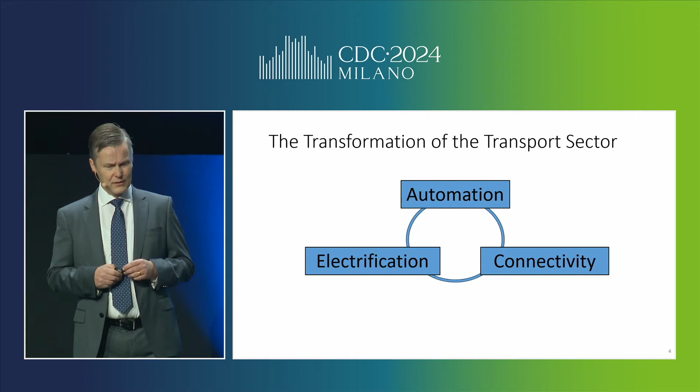If you're interested in doing research in this area in Sweden, it's actually pretty great because we have two of the world's largest truck and heavy vehicle manufacturers in Sweden, Volvo and Scania. And we have throughout the years been collaborating with both of them, and you see some movies here illustrating some of that work.

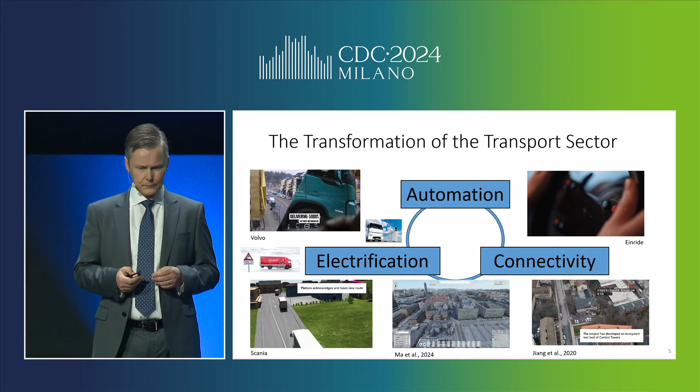But let's look back a bit and let's be a little bit critical. So 10 years ago, SAE, the Society of Automotive Engineers, came up with basically this roadmap of how we should go from the cars and vehicles of today, basically human-driven vehicles, to something where we don't have any driver at all, full automation, level 5.

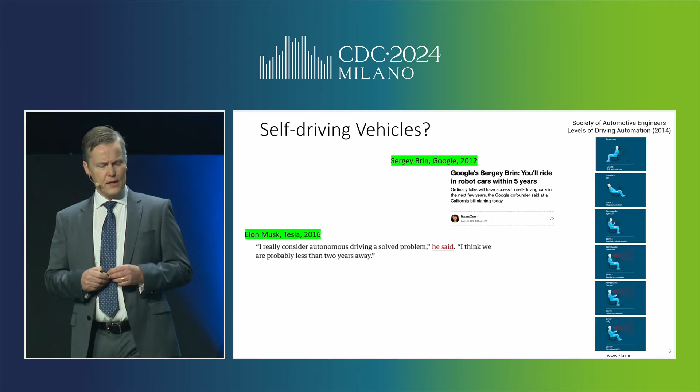And at the time, there were CEOs of big international companies that said, okay, yeah, let's just do it. It's a piece of cake. We just solve this problem. It will take a year or 2 or 3 or so, but let's just solve it. And of course, there is great success that has happened. We have large experiments in the United States, for instance, by Waymo. There are a lot of other success stories.

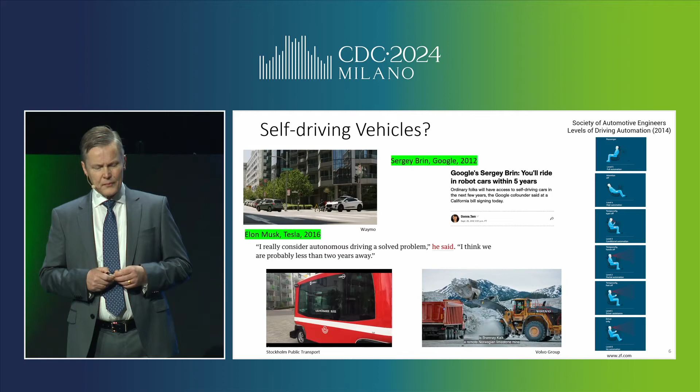You have the videos here from the public transport in Stockholm, and you have some test sites for autonomous driving in a mining operation up in northern Sweden and so on. So did we solve the problem yet? No, not really. We don't find every single vehicle automated. We have these tests going on, but more or less every week things are happening.

Either if you are working in this domain, you experience things that are happening, or you read about it in the news. This is maybe not new to this community, or if you are a scientist, because you then maybe think about this problem a bit more systematically and understand that this is a really hard problem.

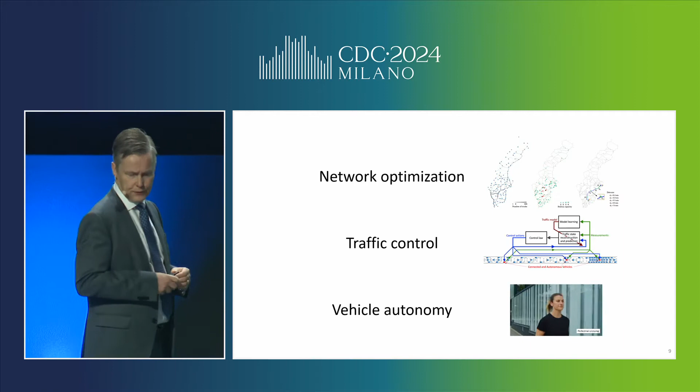And I will talk a little bit first on vehicle autonomy. So how can we actually make this vehicle succeed, for instance, as you see in this video there, very much by connecting the infrastructure to the vehicles.

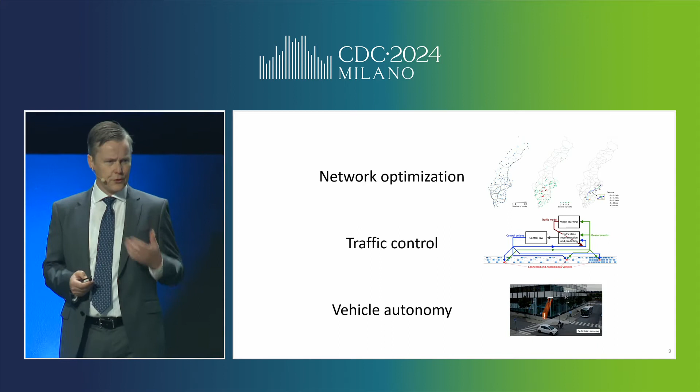So building actually more informative control systems. So I don't think that we should just have individual vehicles solving all the problems themselves. We know from a control perspective that this is not a good idea. It's better to utilize more information. So let's start with that one, and let's go back to another pioneer in this area, Pravin Varaiya.

So Pravin, of course, many of you know, big name in stochastic control, adaptive control, and many other areas, among one, intelligent transportation, automated vehicles, and so on. He came to a workshop we organized in Stockholm in 2018 and gave a very nice, inspiring presentation. There was an Uber accident in 2017 happening in Tempe, Arizona. Some of you might remember it.

What happened was as illustrated on the top left picture there. There was an intersection. There was a human-driven Honda, the blue arrow there, that was turning left in the intersection. And then there came a red vehicle, an automated Uber, into the intersection. There was occlusion in the intersection. You see some snapshots here, so they didn't see each other. But they didn't realize that they didn't see each other. The control system or the automation didn't stop or reason about these things.

And in the talk here, Pravin was discussing something a little bit different. How can you design intersections in different ways and so on? But what inspired us was actually a more fundamental thing from control. When we think about the environment, how do we represent the environment as states? And if we don't even know if there is a vehicle there or what is there, how do we include that in the state representation and the design?

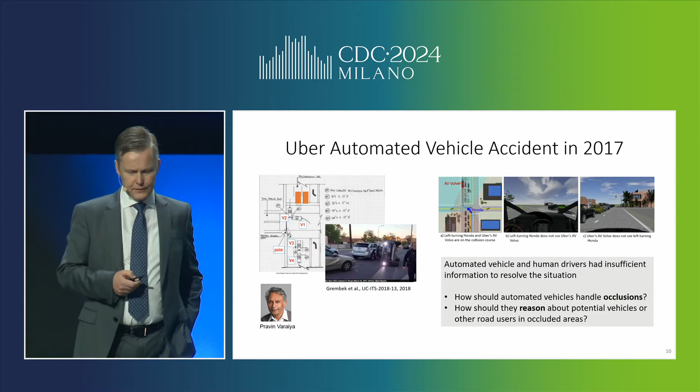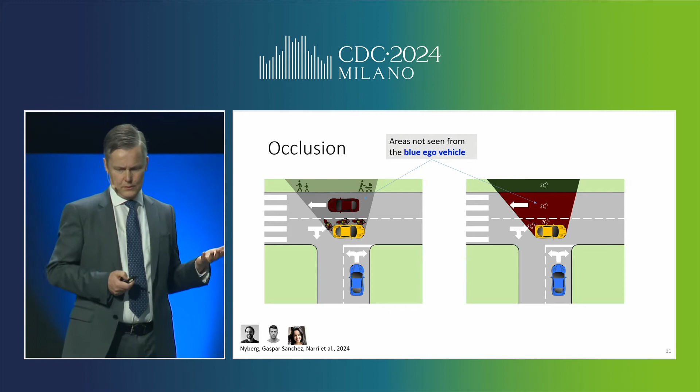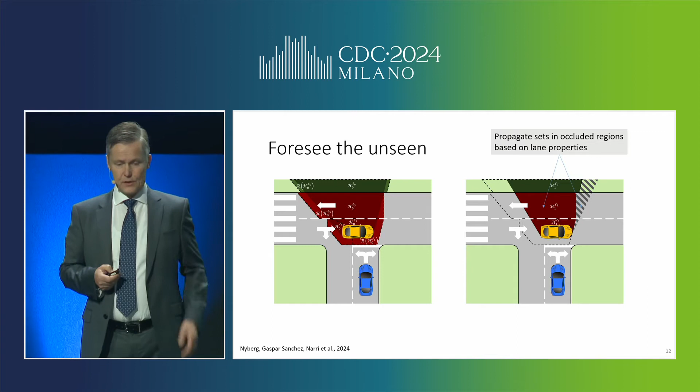So what we can do now is propagate what we don't see as if there were something there. So we could, for instance, do that in a robust, worst case type of analysis, propagate that forward, or we can do it in a stochastic setting where we take the probabilities of how that area is going to move. The nice thing with such a set-based approach is that it's modular.

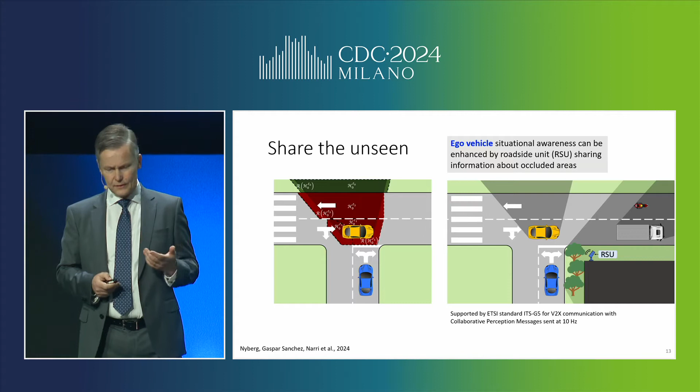So if you now connect the infrastructure, so you have your own sensors, but you have also a roadside unit that sits on a house there that can see what the car cannot see, you can communicate these types of sets and integrate that into the same picture, and you can use that now in this vehicle that is reasoning about if it can go or not. So you see the idea here is very simple.

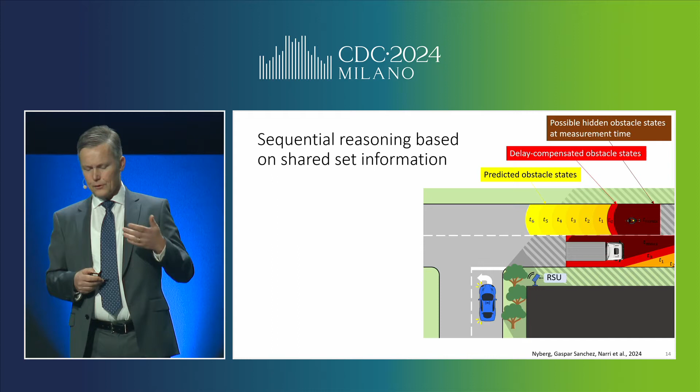So you basically build an architecture where an individual vehicle now fuses information from other roadside units, from other vehicles, and then it predicts forward how the scene is evolving, taking vehicle dynamics into account, but also assumptions on things that it does not see, and then based on that, you find safe trajectories, and you can optimize these types of trajectories. So I want to highlight that this is a problem which is not much implemented today.

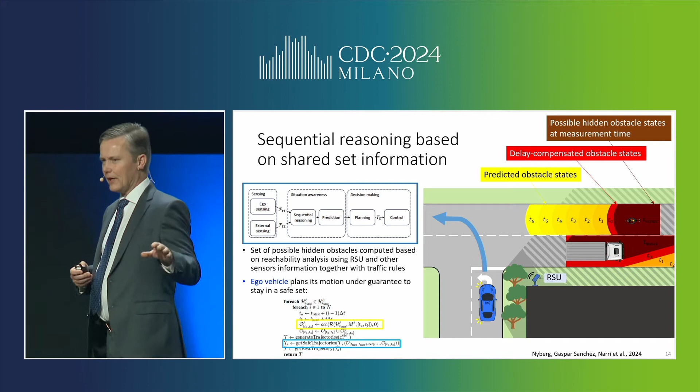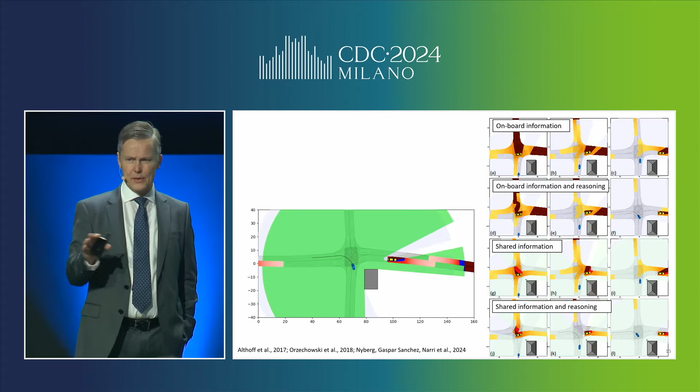So I want to show a little bit the implementation of what we have, but I think it's a rich problem that has much more to do also from the fundamental side. So I'm going to go into showing some simulation and some experimental work now, but I think there is much more to be done here. So this is just illustrating a little bit the same thing in a different setting. So we come again in that automated blue vehicle into an intersection.

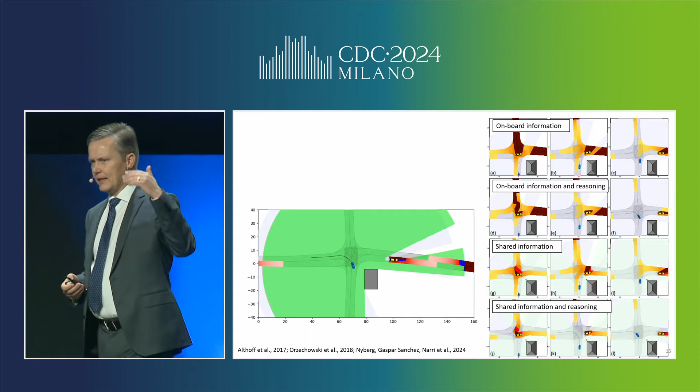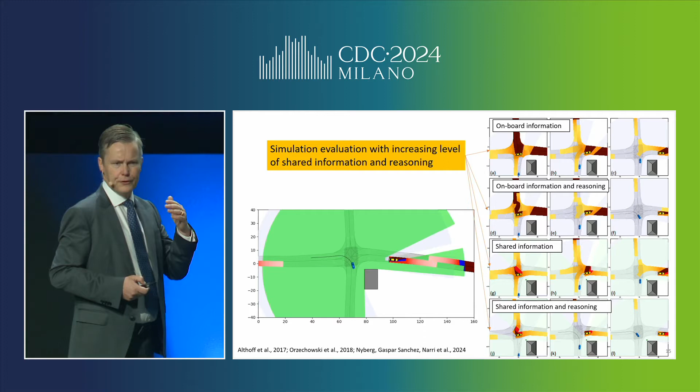Now, depending on the sophistication of the information that you have available and how you reason about that information, you get different types of conservativeness of that automated vehicle. So you can think like in the top of these 4 rows of different scenarios that we go through, in the top one we have only the onboard sensors. And you see the dark color indicates that you don't know what's behind.

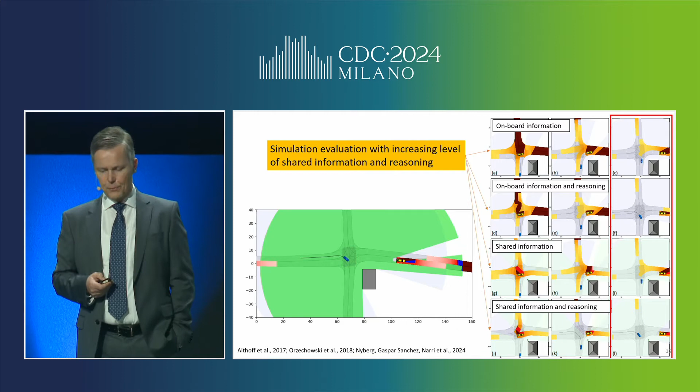In the third column instead, what you have is shared information, and with this shared information now, you can reason much better and have a less conservative trajectory, and in the best situation, which is the bottom one, you progress much faster and so on. But let's leave that setup a little bit, and let's look at how it works in practice.

So now we don't have a blue car any longer, we have a big white truck. So we are sitting in this automated truck that is waiting here in this T intersection at the Scania test tracks outside Stockholm. And then there was another truck, as you saw, passing, and at some point this truck is turning out there. Maybe not too exciting to see this drone video there, but let's look behind the curtain. What is going on in this picture?

So what you see on the bottom two plots is two different snapshots of the sensor information available in that automated truck. So the green stuff that you see in bottom left is LiDAR scans from the truck itself. And then the blue thing is from a roadside unit that helps that truck get information around the corner. And then the truck fuses that information, and then the color coding is, so to say, in the system that is running on board the truck, in the navigator and the planner, the motion planning in the truck.

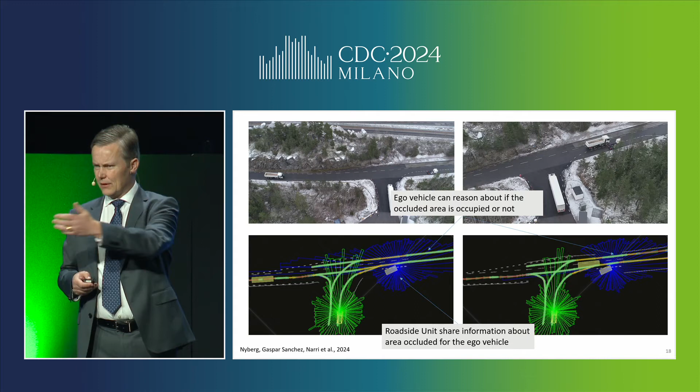And the color coding now means information about if there is something on that lane, or if I don't know, or if I think that there could be something because in the past there could have been something that I was not seeing. So that was the first piece.

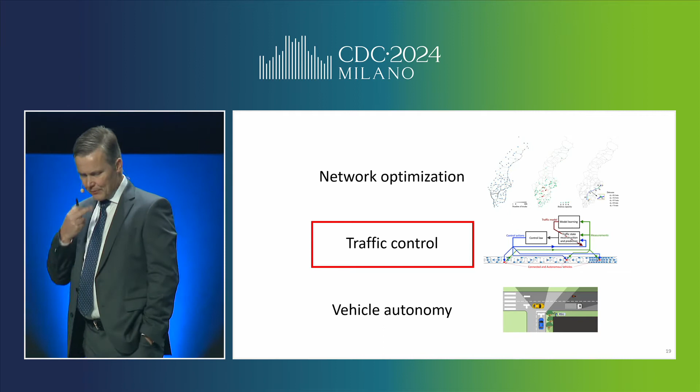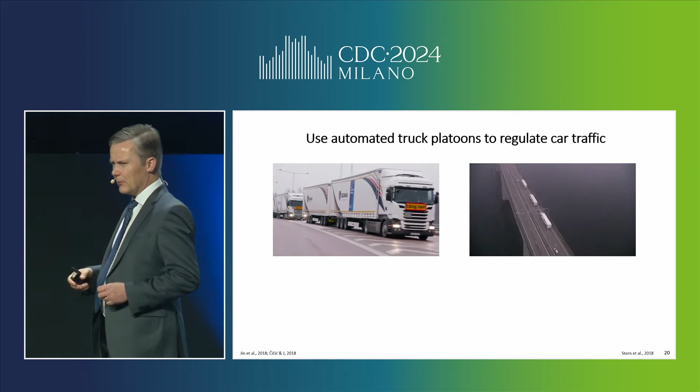So now we switch gear quite dramatically. We will talk about how to use machine learning techniques to do traffic control. So the second problem here comes from some other work that we started some 15 years ago or so. We worked a lot on truck platooning. We developed a system to run this. You see some tests here that we are doing in Denmark and in Sweden. So basically, automated truck platoons so they can travel on the highway like this.

So while we were doing that, we were thinking about the problem here that you maybe see in some of these videos, that the cars are passing the trucks. So trucks in Sweden go 85 kilometers per hour. Cars go 110 or 120 kilometers per hour. So what happens here is that the trucks or the platoon here are acting as a so-called moving bottleneck.

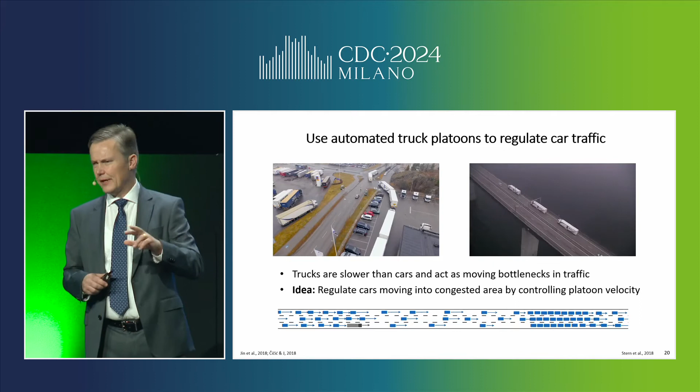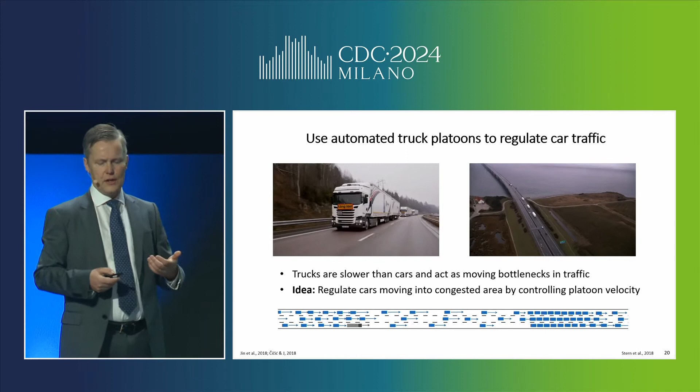So if you think about it, on the cartoon on the bottom of this slide, you see a single truck. For the cars that are passing that single truck, it is as if the highway does not have three lanes, but it has two lanes. While if you are further to the right, you see that there are three lanes, so it's a higher throughput there. If a situation appears like it is here, so further to the right, downstream, there is a congestion, you can imagine that you can now do a little bit of regulation, slow down the cars a little bit with these truck platoons in order to mitigate some of that congestion.

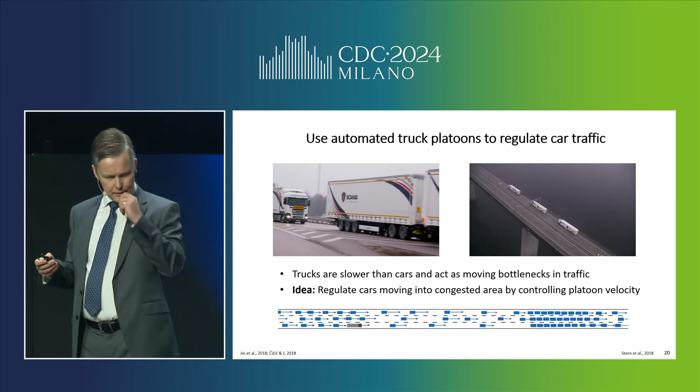So that is an idea that we got quite excited about, and there are other people here in the audience also who have been working on that. So let's go a little bit more into the detail of how this is done and what are the mathematical models behind. And let's go back to some high school physics here, to Euler and Lagrange.

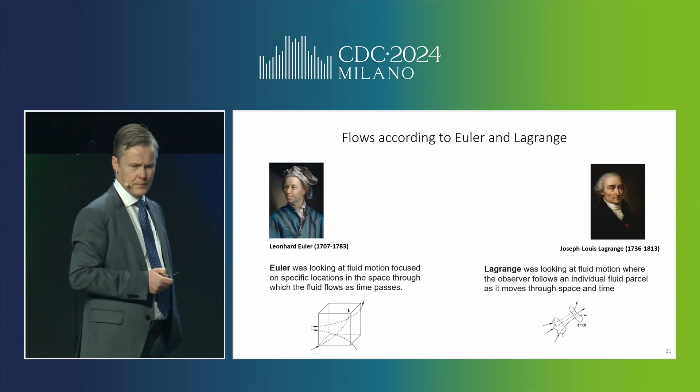Euler, when he derived the fluid equation of motion, he was thinking about the fluid through a pipe. He made a cut in that pipe, and then he derived the equation of motion by considering the fluid through that cut. Lagrange, on the other hand, did something different. He considered a small parcel of that fluid, and then he said, let's see how that evolves some delta t forward in time, and then he derived his equation of motion. So what does this have to do with traffic flow now?

Traffic control according to Lagrange. What does that mean? That means that, okay, in any single vehicle today, you have a mobile, or you have a built-in system in the vehicle, so it knows where it is.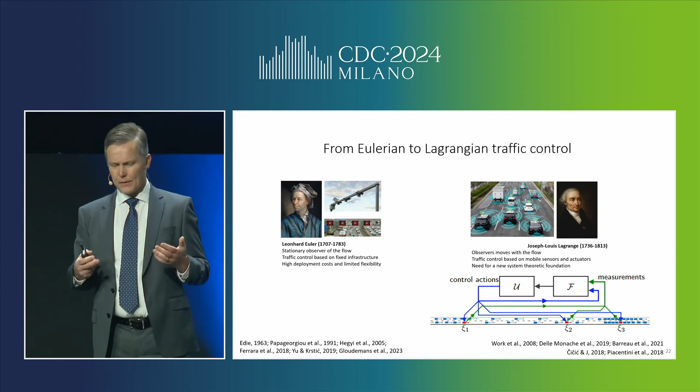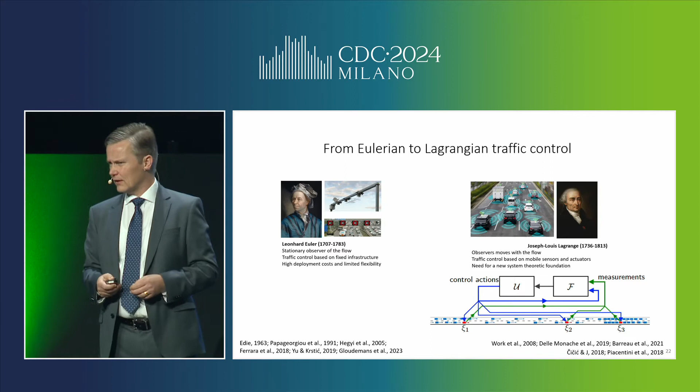So we have some red vehicles with which we can measure the density and flow perhaps around this vehicle. We bring those measurements in, and then we base control action on that information, which could mean that we are controlling the same vehicle that sent this information to us, like in the picture here, or of course, these can be separate vehicles if you want. So let's see how this can be done, and let's see some work, particularly that we have been doing about this thing. So here is a little bit more detailed picture, right?

So what we need to do, of course, we don't know the dynamics of the road traffic. So we need to build that model online. So what we do is that we learn that model out of measurements. And out of that learned model, we try to reconstruct the state of the highway on that segment where we are, and then we use that to predict forward in time what the state would be a little bit ahead. And then we use that prediction to take control action, maybe increasing the speed of this vehicle a little bit or decreasing the speed of them a little bit.

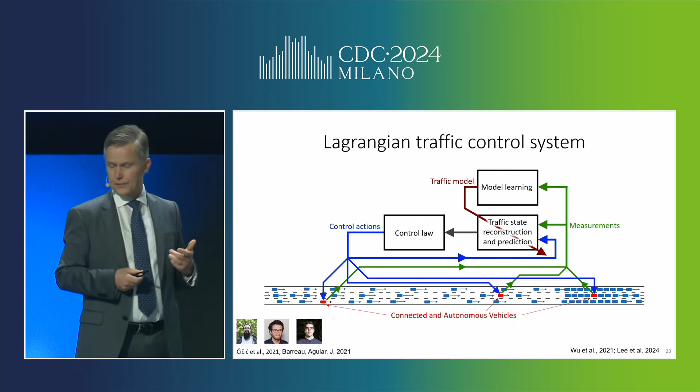So let's go into some detail in the mathematical modeling. So sorry for you who are in this area, this will be very, very basic. So there are two types of models if you simplify the world a little bit here in traffic control. Either you have microscopic traffic models, where we think about the dynamics of individual vehicles. Or we have macroscopic traffic models, where we think about density along the road. So a continuous variable in time and space.

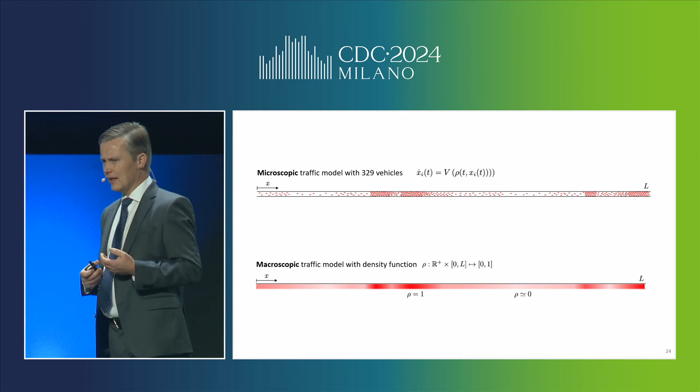If we model individual vehicles in the microscopic traffic model, it means that we just tell what velocity each individual vehicle has. In the macroscopic model, we have the evolution of the density along the road. That is the celebrated LWR model, something like this or something more complicated than this. You see there is a velocity function, a map v here that pops up. And that's the same v in both these pictures.

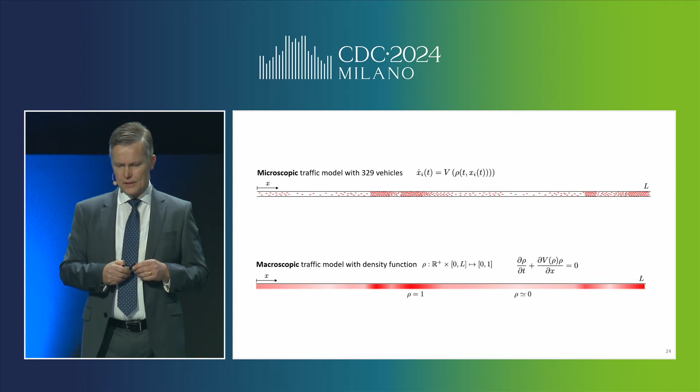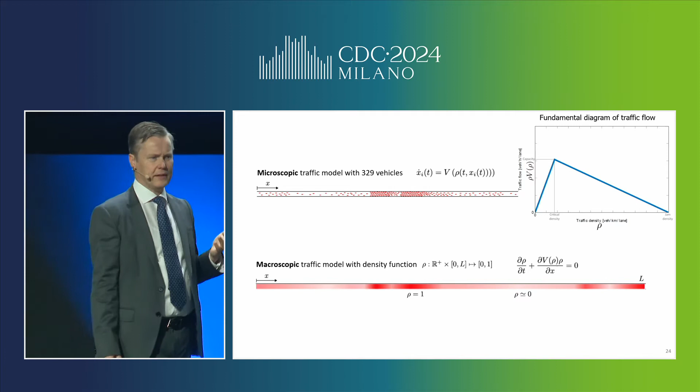So in traffic theory, they call that the fundamental diagram, or actually not exactly the velocity. They take the density times the velocity, so the traffic flow on the y-axis and the density on the x-axis, and consider that. And in the simplest setting, that has this triangle shape, where if you have zero density, you have zero traffic flow. If you have too high density, you have zero traffic flow. And then you have a linear increase until you come up to the capacity of the highway, and then it decreases again.

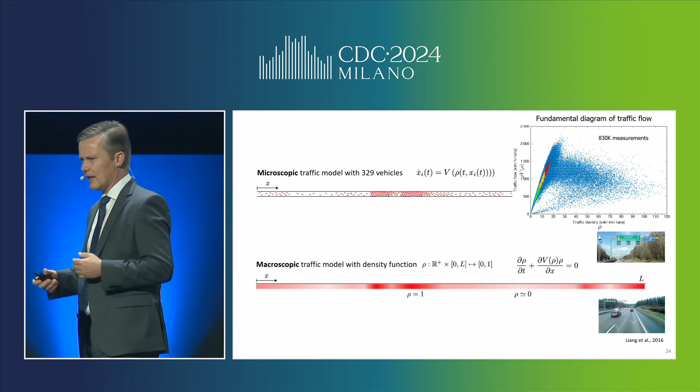So this is not only a theoretical construct, this is very similar to what it looks like in practice. So this is an experiment we did on the highway south of Stockholm. Actually, we were out there driving our trucks for months, collecting data and so on, and then we just look at the data. So the data here actually come from the existing infrastructure that we have on the highways, where we get real-time data. And you see that, to some extent, for lower density, it reminds of this shape. For higher densities, we are all over. But this is what it looks like.

But let's come back to the problem we were interested in. We were interested in a problem where we have cars, and then we have a few connected automated trucks or other types of vehicles. So if we now represent that, that would be a model where we have that PDE model representing the density, and we then have, in this case, capital N number of ODEs describing the individual vehicles. So this is a very interesting object to study, which mathematicians are studying.

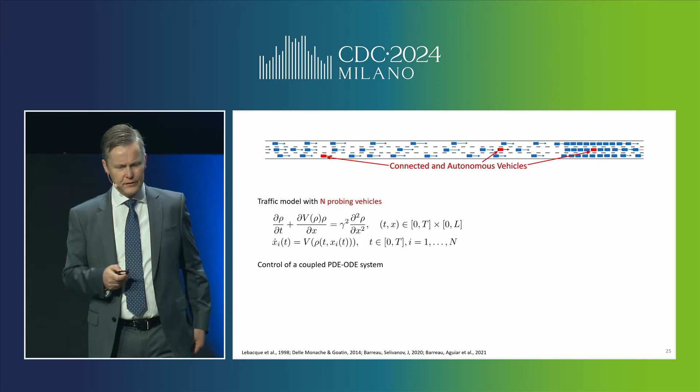People from this audience are studying it. Delle Monache, who sits just here in the audience, did her PhD on this topic. So a lot of interesting phenomena can happen in this, and we need to understand when this is well posed and so on. Here we will just look a little bit using that model and see what it looks like, and then come back to the training or system identification part. But let's look at what characteristics this type of model has.

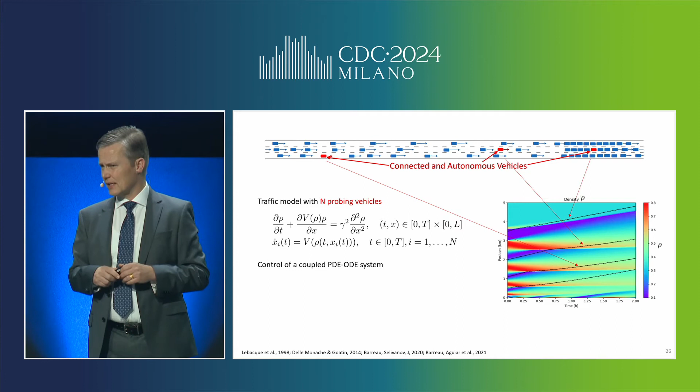So we have N number of connected vehicles. So these red vehicles generate these black trajectories that you see in this plot. In the plot there is time on the x-axis and position on the y-axis. So you see the red vehicles are passing through, so to say, the highway there with some distance in between them. The color coding is the density. A more reddish color means that there is a higher density of vehicles. A more bluish color means that there is less density. So the problem we are interested in, I talked about model learning.

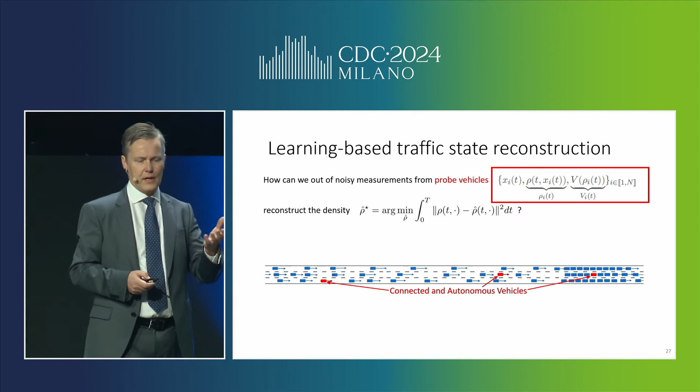So the problem we are interested in is now, how can we from data of these red vehicles learn a model so that we can reconstruct the density all over that square? So what's the question I'm interested in answering? I'm saying that I get data from the individual vehicle. So I get the position of the vehicle, xi. I assume that the vehicle can sense the density around them, rho i, and that they know their velocity, vi. So we have n vehicles that provide that information. Can we, out of that information, estimate the density rho hat?

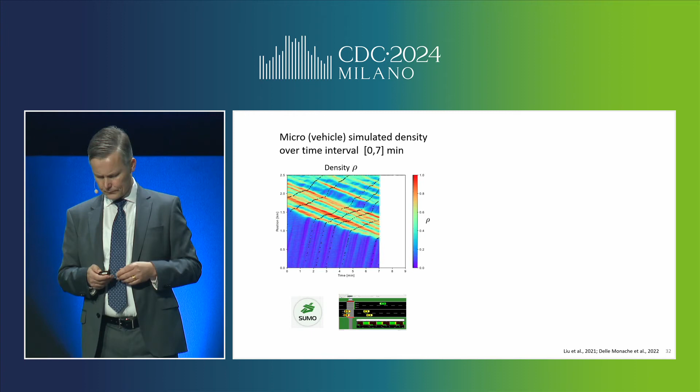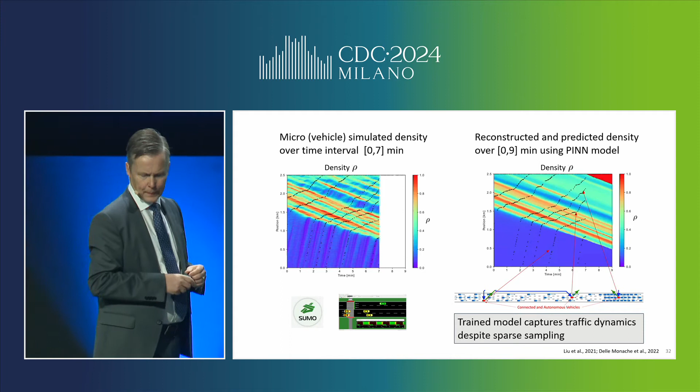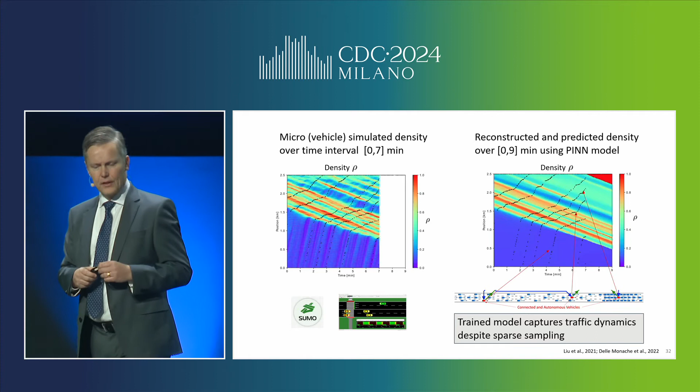So now we do exactly what I was talking about. What you see here is the data that we got from the probe vehicles. And even if we only get data around these lines, you see that between time 0 and 7 minutes, the color coding to the right is quite similar to the one to the left. So the reconstruction of the state is quite good. We can then use that model also to predict into the future, and that is what you see on the right side of the plot to the right. So we use that model and we predict what will happen the next 2 minutes over this road segment.

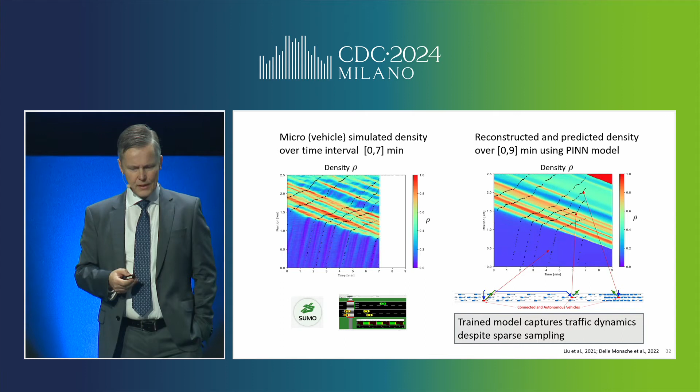With the data from the probe vehicles, we have no clue what was going to happen up in the right corner of that plot, because we didn't have any probe vehicle that provided us with that information. So therefore, there is this little reddish corner, as you see there, which is in some sense an impossible thing to solve. But when we have been running this, we're quite surprised how well this type of method performs.

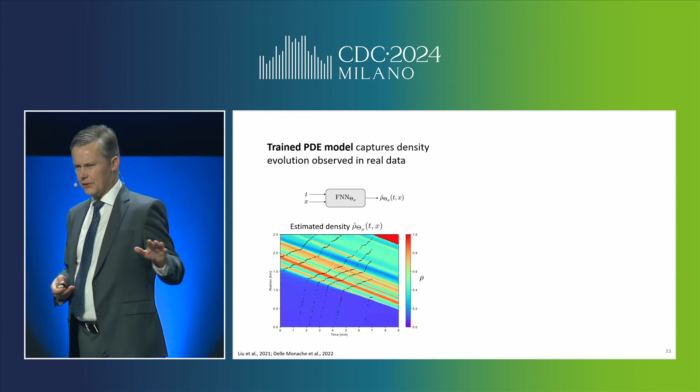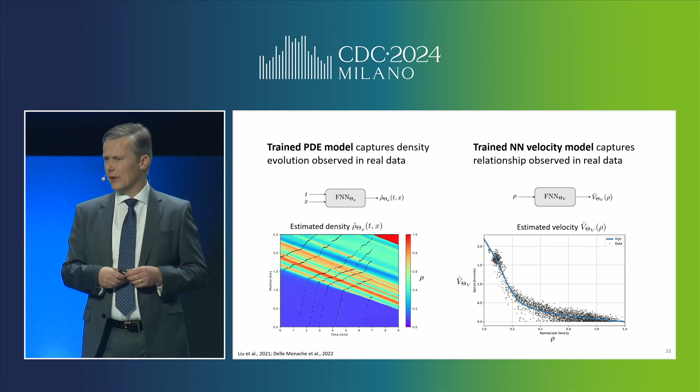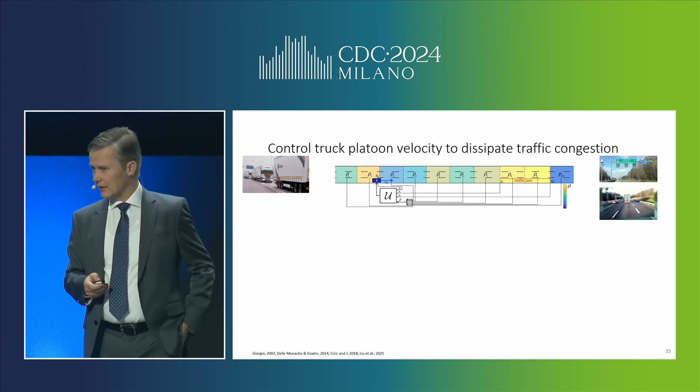So how do we use this now for control? So back to the problem. You see we have one highway, we have a truck platoon, the blue dot there. To the right, along the highway, you see there is some yellowish area to the right, high density. There is some traffic jam there. We would like to see if we can control this truck platoon in order to alleviate a little bit the congestion. So let's take a scenario like the one you see here.

So in this case, we have space on the x-axis and time on the y-axis. If we are moving now with the platoon at constant speed, it means that we have a straight line there. So this is the red line that you see going through this plot. The yellow area in the plot to the left is high density, so it's a congested area. So you see it starts at about 50 kilometers and at time t0.

So think that there was a car accident or something happening there. Suddenly it built up big congestion. That congestion is now traveling backwards in space and forward in time, and then at some point is dissolved. That's what we see there, right? In this case here, we don't control the truck platoon. It's just driving through, and you see it go a little bit slower when it travels through this congested area, and then it continues on the other side.

So let's now apply the control that I've been talking about. So how can we think about this control? So we want to regulate the velocity. So we say that, okay, the trucks do not just follow the flow, but we can actually change the velocity and go at a slower speed than what we could, right? So what would that correspond to in the fundamental diagram?

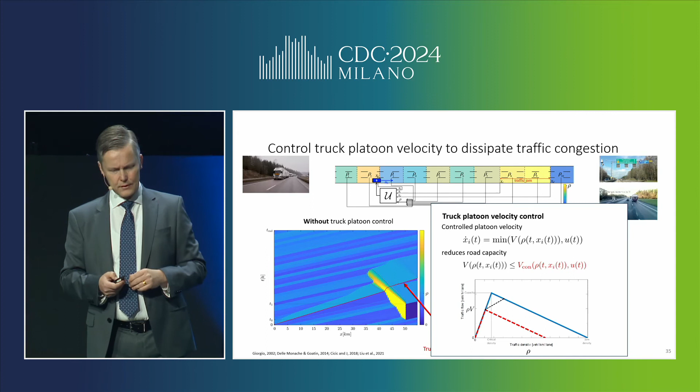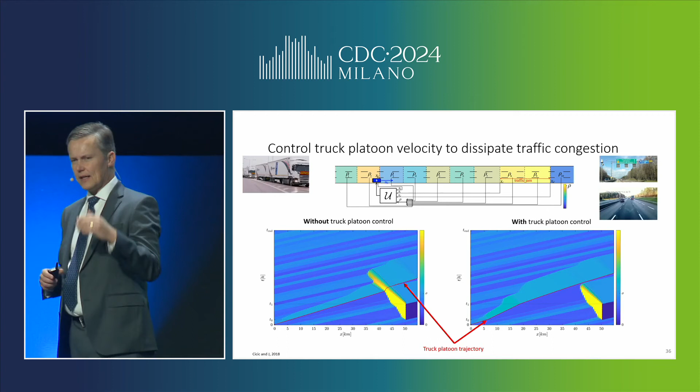So if we apply that in this scenario, we get the picture that you see here. So in this case, again, you see the truck platoon is moving through over the highway. It passes now just when the congested area has been dissolved. If you compare the slope of the red line on the right plot to the left plot, you see that the truck platoon is going slightly slower most of the time there. The color is a little bit lighter above the red line to the right, which means that there is a little bit of slowdown of the traffic flow.

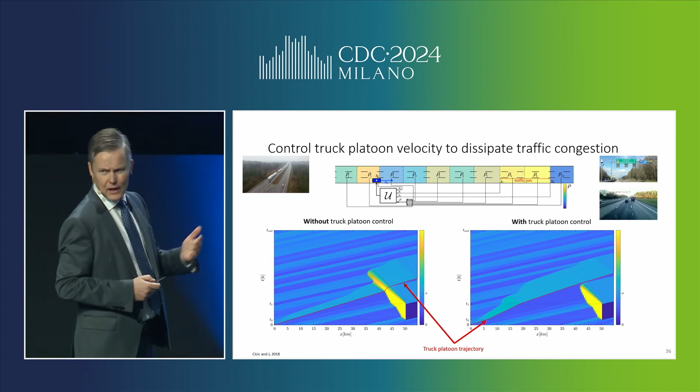So now the interesting question is, when we're doing this, it looks in the picture that we succeeded to have less yellow. But is less yellow good for everybody? Or is it maybe just good for some here? So did we slow down the total traffic or not? In theory, this is an open problem. It's not so easy actually to analyze that, and I encourage studies of this. Maybe one needs to simplify the model that we are considering here a little bit. But we can just illustrate what I'm talking about with some further simulated scenario.

So this is a slightly different scenario than previously. You see we have congested areas to the right. We can compare with when we didn't have that congestion. What time did it take on average for the cars to travel, in this case, 5 kilometers? So when the congestion is there, there was actually an increase of the travel time of 38%. So now we can apply the control that I've been talking about, and if we apply that, the increase in travel time is just 8%.

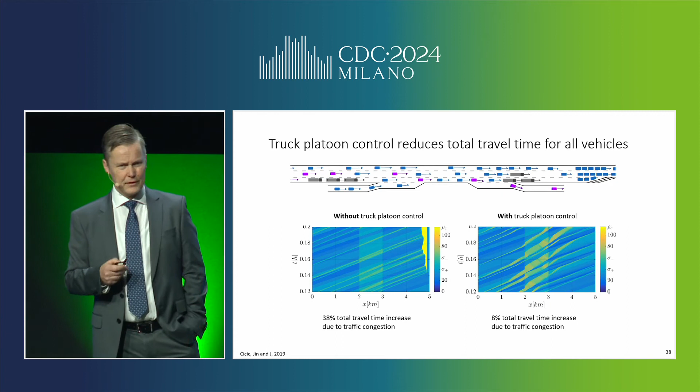So it is actually possible with this type of control to utilize the infrastructure in a more efficient way and actually improve it. I mean, from an electrical engineering perspective, what do we do, right? It's some sort of low-pass filtering that we do through this PDE that we have described here, right? So we are maybe not surprised that this could be working, but to me at least, it's quite a fascinating, different type of control problem than what we maybe see and teach in our courses.

So I have one more case study I want to describe, and this is something which is really urgent, and I encourage people to work on it.

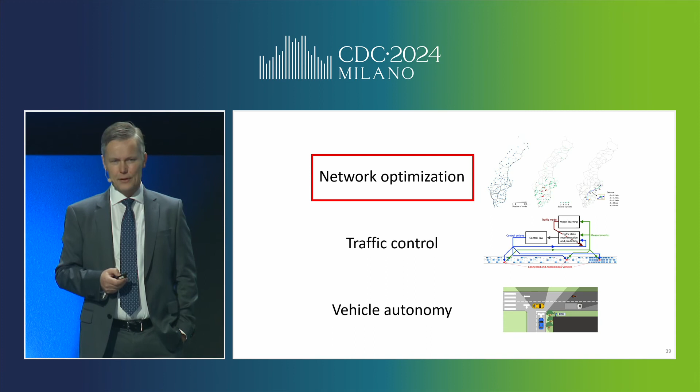I will be quite brief here, but you know that in Europe, the US and Asia, at least, we already have electric charging infrastructure for cars. We don't have an infrastructure to charge heavy vehicles. Why? For various reasons.

If you have seen what corresponds to a supercharger for a heavy vehicle, you know that they are huge, right? You need much more power to charge a heavy vehicle than your regular car. But that raises something interesting, as you saw in my earlier slide: you can buy heavy vehicles that are electric today.

So we get an interesting problem: how do we get the deployment of charging infrastructure? And how do we make that charging infrastructure a business that can support not only the automotive companies, the logistic companies, and so on, but also those who provide the power? So there are a lot of opportunities to understand where to locate these charging stations and how to operate them in the overall freight transport system.

So I will just show a little case study that we did on that for Sweden. We've been working on where we should place such charging infrastructure for heavy vehicles in Sweden. These are the green dots that you will see popping up here. Then we consider an example where we have 1,000 electric trucks. We have models of freight transport for Sweden: where the origins and destinations are. We utilize that model, and we include uncertainty in it when it comes to travel time and so on.

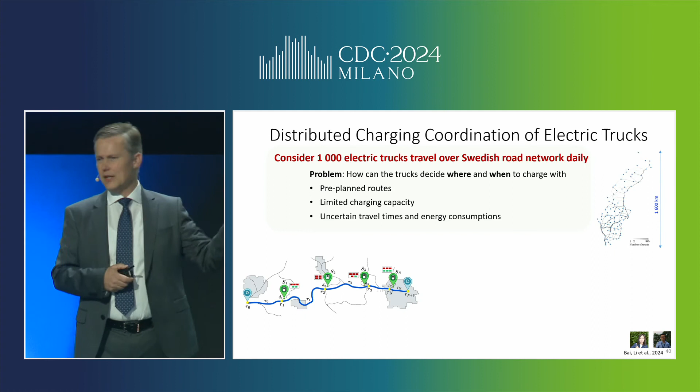Notice that for a truck, if it's an advanced one, it typically goes more or less 24/7 if it goes across Europe; if it only goes within a country, it typically goes during daytime. These routes are known. When the driver sits in the truck, he knows where he should pick up the goods and where he should be going. So how can you solve this problem?

We have proposed a solution with two types of agents. One agent is the individual truck. We don't think we can have a centralized solution, because the logistic companies don't want to tell where they are driving or where they have their customers. So we have a distributed solution. The trucks coordinate with the infrastructure, but not with other trucks. And the infrastructure, that is the charging station, can keep track of what resources it has.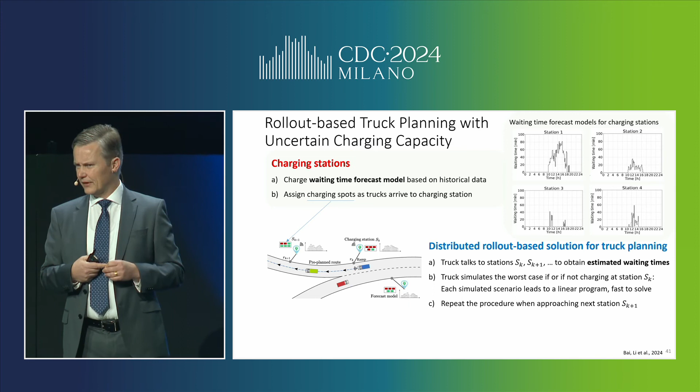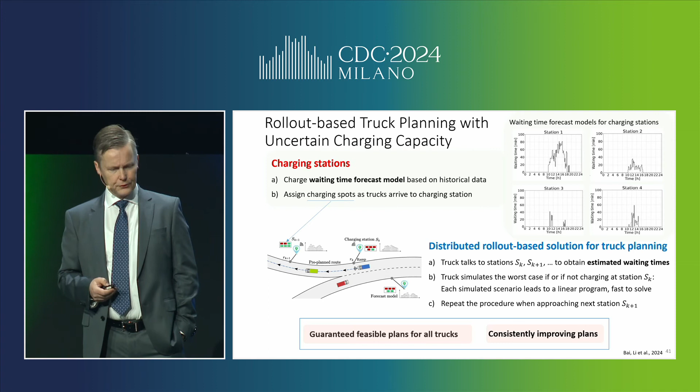The solution here again uses tools from our community: it's a rollout-based solution. You have this fairly large multi-agent system where each agent, each truck, along its route interacts with the potential charging stations. When it gets these forecasts, these estimates, in this particular case we do a worst case analysis. We form the worst case it would have, given that it would charge at a particular charging station or not. Out of that, we get linear programs that the individual truck can solve online, and it can iterate this as it travels across Sweden in its mission.

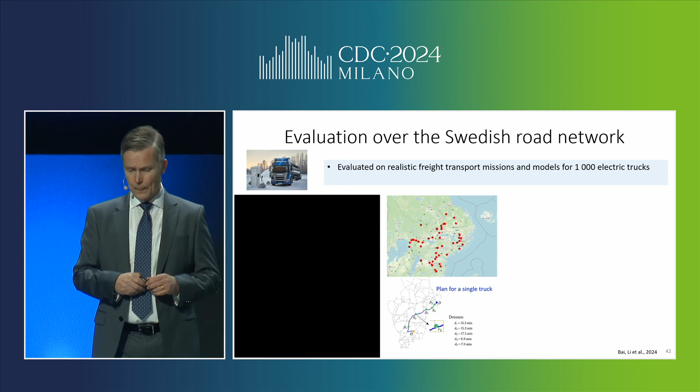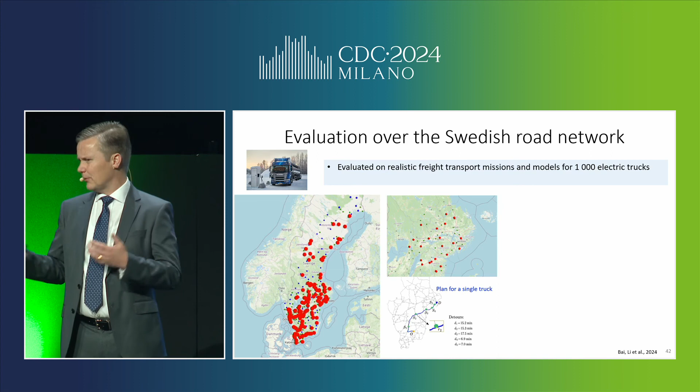So does this work well? Is it good to do that extremely simple, low-cost coordination? Basically nothing needs to be added to the system. This is very simple coordination. But that simple coordination gives a drastic reduction compared to just leaving the system open. In this big study, we got about 50% lower waiting times. So with quite a simple type of coordination, not the most sophisticated control, just a rollout type of solution, you get such a benefit.

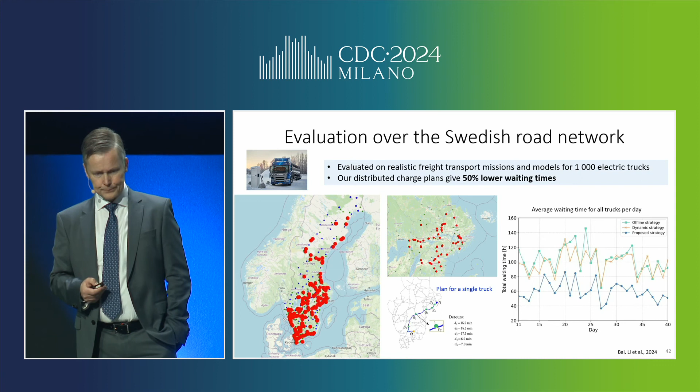So with that, I would like to give a little conclusion and reason a bit. So I don't know, maybe you were already convinced. If not, I mean, the future is not just more data and more ML or so. The future is to be able in this system to deal with uncertainty. And for the uncertainty, we have tools. It's not just an application, because these tools need to be developed so that they can handle that big data

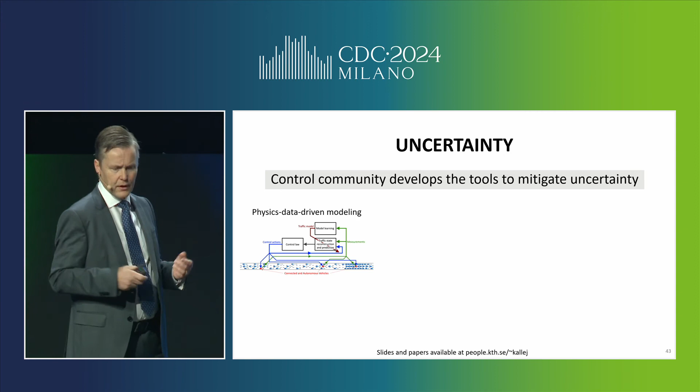and other things. I illustrated here on work that we have been doing on transportation. It's one application area, but there are also others. I talked about that with these methods and much more online and real-time data, combining it with physics-informed type of learning techniques, we can actually build quite more sophisticated models to do control, like in the traffic control example. I talked a little bit about this stochastic forecasting and using techniques from reinforcement learning.

And I talked about that actually, if we now are integrating the infrastructure into vehicles, which I very much believe is what we're going to see, when we do that, we need to have ways of understanding what information we should exchange. In such an infrastructure, it will not be video streaming to everybody, because the infrastructure is not going to be able to support that. Will it be only a state variable, x or x dot? Maybe not. Maybe a set representation is convenient. Maybe it's zonotopes. Maybe it's something else. But I think that we need to think about what are these types of ways of exchanging information in this scenario.

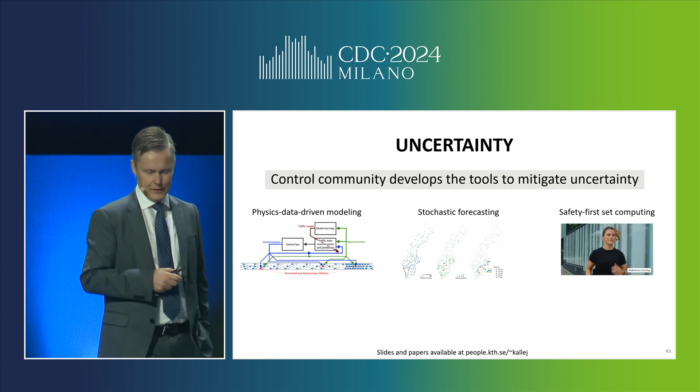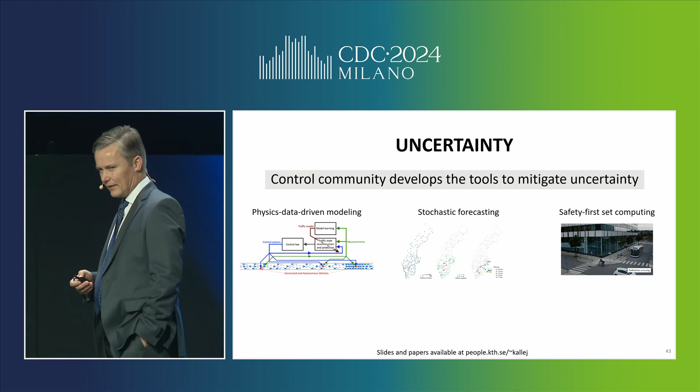So I think that, you know, I would like to communicate to the students, congratulate you that you chose the right area. I think this is where things are happening also in the future in our control community. I think it's not only that we have the mathematical tools, I think we also have the right spirit. So if you allow me to use one more Latin quote in my talk, I think we know how to proceed quickly, make progress, but also be careful.